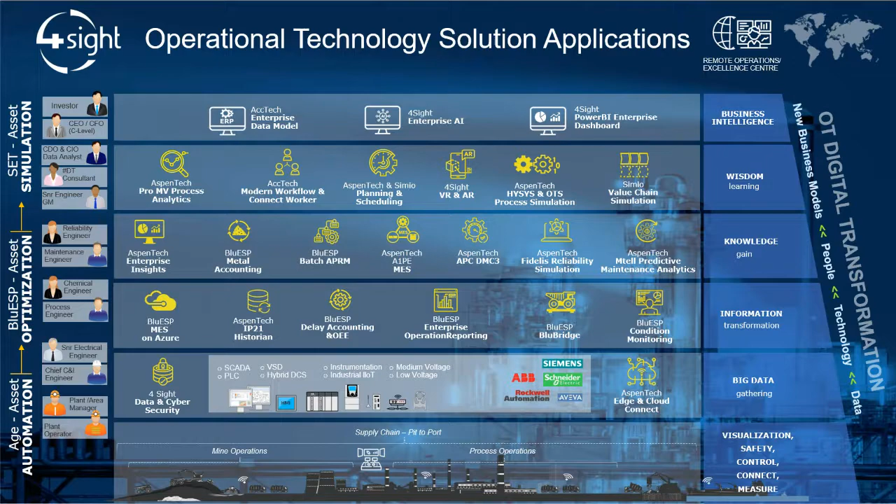If we look now more detailed at BluESP on the next slide, the way we see BluESP is really as an agile and dynamic company.

We basically use AspenTech as our role model to learn from. They've got more than 2,500 engineers, they've been around for 37 years, and they develop some of the best asset optimization technologies out there today. We learn from them and bring it to the local market.

Some of these technologies include advanced embedded AI in their software. More and more, they take existing proven and tested software and bring AI and machine learning into it, into areas like advanced process control. We'll see this during the course of this webinar series, along with hybrid models and machine learning.

An example is the GDOT technology, where they use these technologies to orchestrate much bigger plant areas. Kevin might talk today about dynamic advanced control models and self-learning models, so your plants and control models don't auto-tune themselves out of sync, or things like AI-powered cognitive guidance systems to make the work experience much better.

So various different things. Looking at how AspenTech positions their products: the first set is the design software, shown at the bottom. It's all about how do I simulate a new process, how do I design it, how do I cost it to its optimum, and how do I build it. If I'm going to build a new plant today, I want to build the best one possible. We're not focusing too much on design tools in this webinar, but there's a set of that.

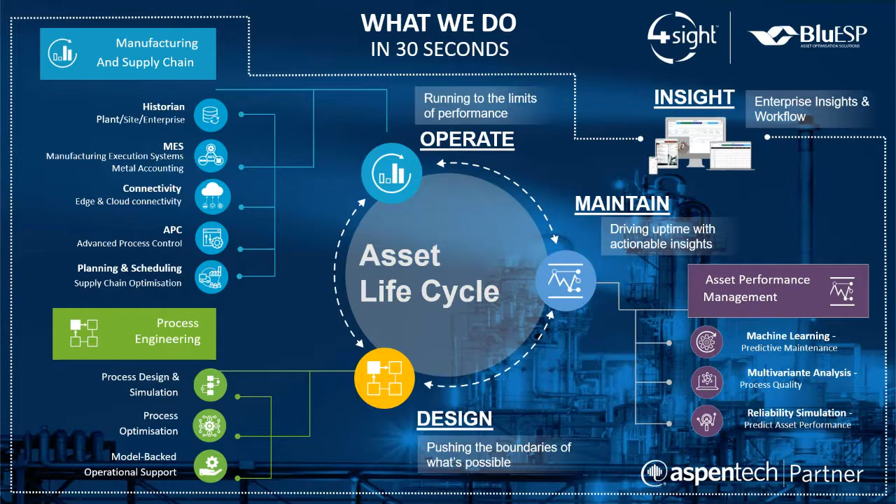The key focus is optimizing control of the modern-day operation, and that's the theme of today. With no further ado, I'm going to ask Merinda Westcott, who is the business unit leader of our advanced process control division at BluESP, to tell us a little bit about herself and introduce the speaker of today. Merinda, over to you.

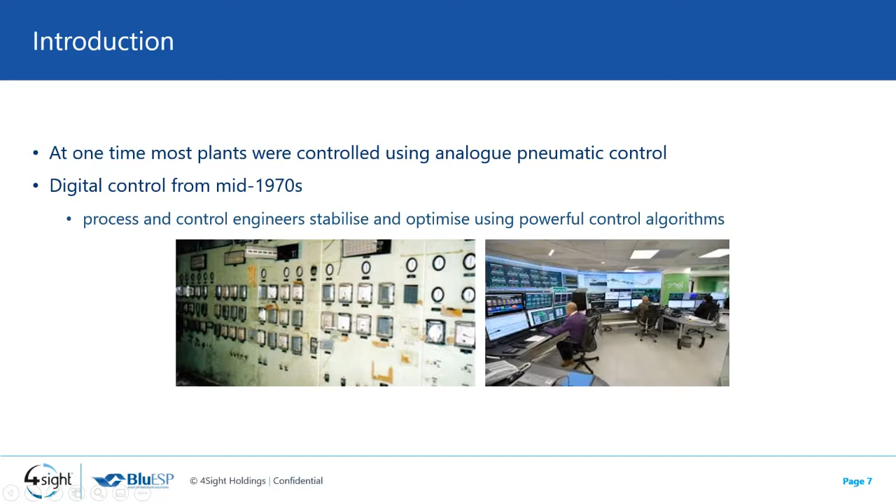Advanced process control isn't one technology, it's a set of technologies, and people have different definitions of what they might be. I've picked out 3 or 4 here to talk about or to mention.

The first is what used to be called intermediate regulatory control, now sometimes called ARC, advanced regulatory control. Typically these are schemes that you can build in your DCS or PLC system. They give you advanced functions like ratio control, split range control where you do different things depending on whether you're above or below set point, overrides where you normally control one way but sometimes control in a different way, constraint control, and decoupling control, which is kind of a first attempt to deal with multivariable systems.

The problem with some ARCs, or even most ARCs, is that they are very well understood by the person who wrote them originally, and when that person leaves the company, no one knows how they work anymore. So they have a maintainability issue.

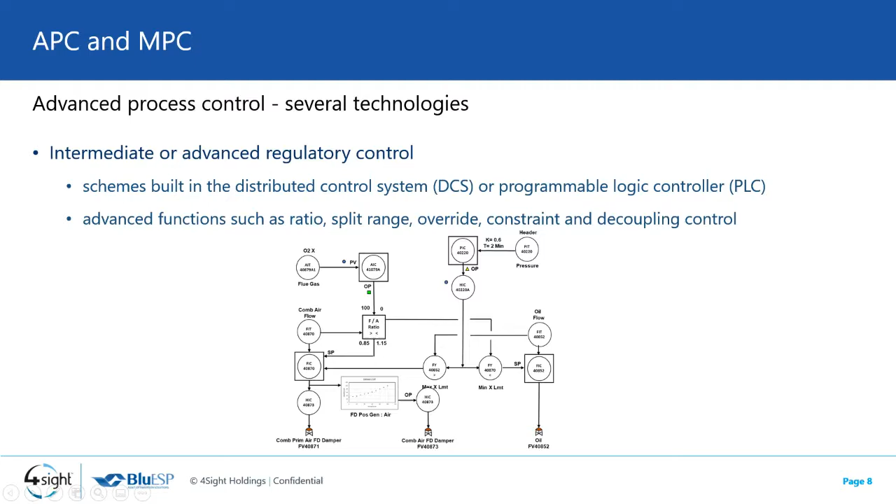Three other technologies include expert control, fuzzy control, and MPC. Expert or rule-based systems are computer systems that emulate the decision-making ability of a human expert. So if you have an expert who knows how to run your plant, why not just copy what they do in a computer program? That's what an expert or rule-based system does. These are quite popular for some classes of control. Of course, one has to ask, why would we limit ourselves only to doing as well as a person can do? Maybe we can do better.

Fuzzy logic is also popular, described by if-then rules, with inputs that can be cold or very cold — so the inputs can be fuzzy. I've done a drawing here of a fuzzy system.

Became very popular in the mining space at a time, I think, and they certainly can do a job. But when we come to optimization, we find that these systems have limitations in terms of building the rules we would need to optimize the system.

And then there's model predictive control, which is really what we're going to talk about today, which uses a dynamic model to predict where the process is going and then potentially changes the trajectory of the process in a way that is optimal and therefore makes money.

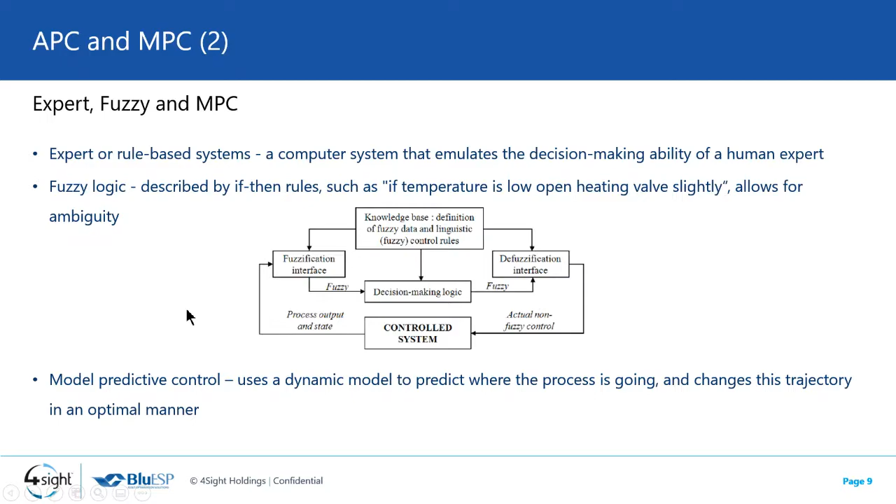So if we're going to do model predictive control, we need models, and we can classify these models as linear or nonlinear, empirical or rigorous.

Starting with empirical models, by that we mean that we find the models using data. We do a plant test, or we go through historical data and we calculate some sort of statistical model. So there's no physics behind this, it's all statistics, if you like.

They have no background in the mass, energy, and momentum balances that chemical engineers are so fond of. So we could derive rigorous models for our processes, and we do.

These are accurate. They can extrapolate. They can take us from one point to another, but they turn out to be expensive to build and validate. And in fact, to validate them, we often need the data that we need to derive the empirical models.

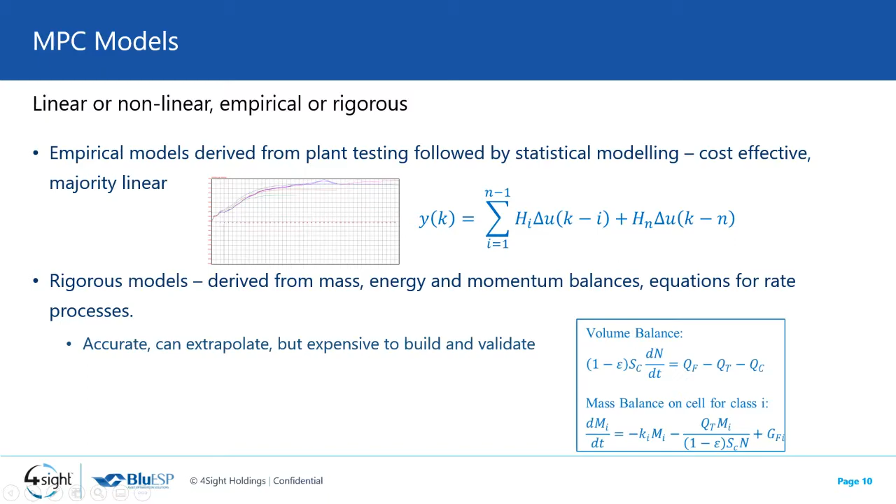So what we find in practice is that the large majority of commercial MPC applications use linear empirical models. And that's from a cost saving perspective.

A little bit of history about these MPCs. Originally, they came out of the oil refining world. Mid-80s or early 80s, Cutler invented a formulation, if you like, of MPC called DMC, Dynamic Matrix Control, which eventually became DMC Plus and DMC3 from AspenTech. Unfortunately, Charlie Cutler died a couple of months ago, I've been told.

Round about the same time, some people from Honeywell and some companies that Honeywell acquired created a project called RMPCT, Robust Model Predictive Control Technology. And a different group at Shell, led by Pascal Marquis, developed a product called SMOC. I believe that stands for Shell Multivariable Optimizing Controller. And that's used a lot in Shell refineries, even currently.

So it was an idea whose time had come. In 2003, Joe Qin and Thomas Badgwell did a survey with the companies of MPC applications, and they list 3,000 odd applications in refining, petrochemicals and chemicals, and more than half of those used AspenTech technology. So this is clearly a successful technology. If there are 3,000 applications, and that was 2003, you can probably count on that being doubled by now.

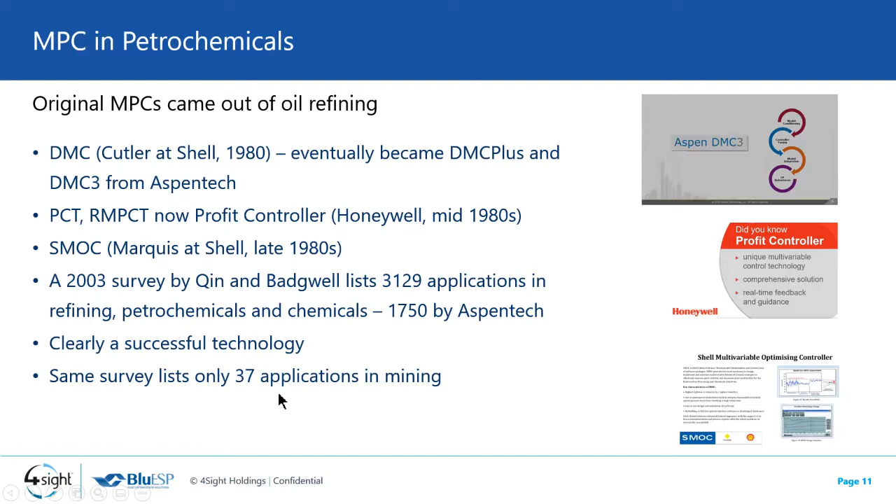More recently, Rogers and co-workers looked at the literature for what's been published on MPC. And they list a number of references in a number of processing areas, and they're all very interesting. The trouble is only 6 of them in total are industrial applications. So something's strange, because either we're not doing MPC in mining, or we're not talking about it.

And I think it's a bit of both. We're not doing as much as we could to improve operations using these technologies. And then the ones we have done, we're not publishing. So there's room for improvement here.

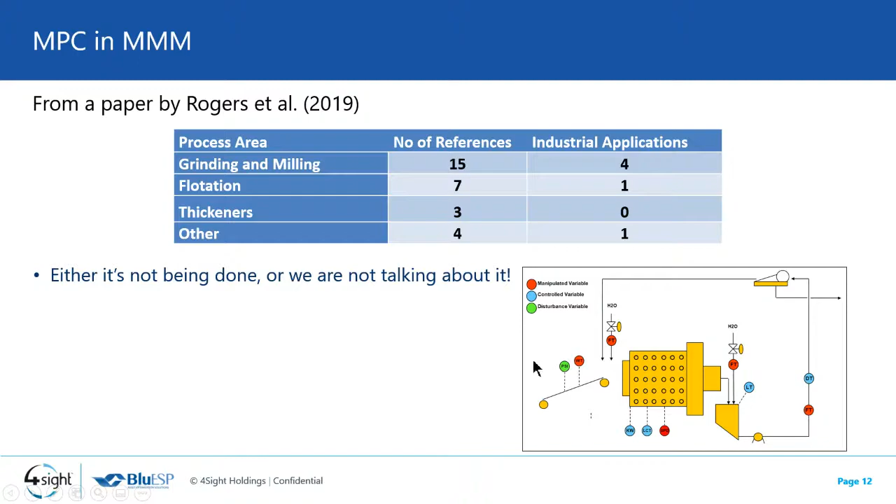So clearly we're not going to do MPC because it's a cool technology and we like building models. We need pointers to what kind of processes would benefit and what are the financial benefits.

Because MPC is model-based, it inherently handles the interactions within systems. A lot of the processes we deal with are interactive. If we increase the feed to a mill, more than one thing changes, and we may have to make other changes to compensate for that. So there, the model predictive technology helps greatly.

In some cases, we're limited by different constraints at different times. It could be day, night, summer, winter, or product grades, so we may have to change grades. In that case, you want a flexible control system.

This third point is really very important. If your system makes more money when it's operating close to constraints, it is a good candidate for MPC. Because what the MPC does is it takes the operating point that we have now, somewhere in the middle within the operator's comfort zone, and pushes towards the operator's discomfort zone, where the operator won't operate. And if in that pushing we make money, then we can make that money consistently.

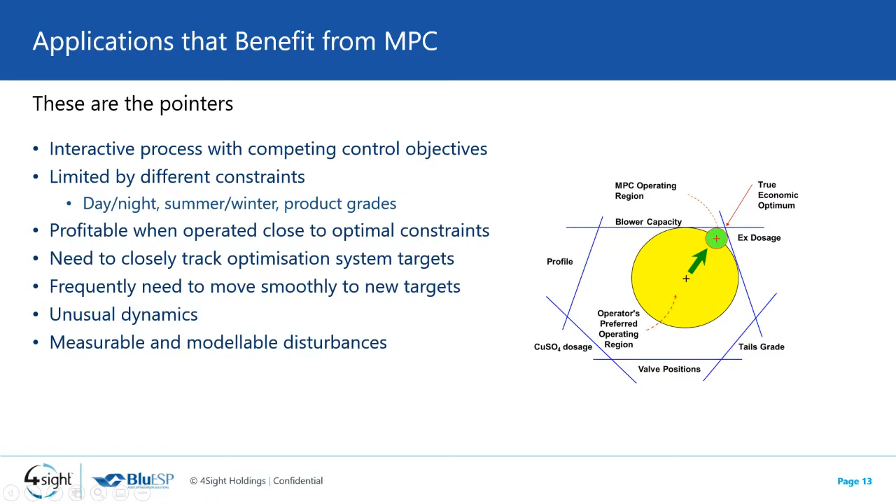So despite the paper by Rogers, I thought I'd put together a list of where I know MPC has been done in mining, either where we've done it, where colleagues have done it, or I've just heard about it. And it is a large list.

Mills in particular - primary, secondary, ag, sag, Isamills - crushers, flotation, which I'm going to talk about later, leaching, some work I've been doing recently, and some work I know that was done at Alcoa. Thickeners and clarifiers have been done. We've done cyclone banks. There has been some look at dense media separation, not as much as I would like.

We've done electrowinning. Boilers are interesting because you shouldn't ignore the utilities on your plant - this might be low-hanging fruit for quick wins on benefits. Flash dryers, acid plants, jig plants, hot gas generators, and ones that I don't know so much about, but which I think will come, are smelters, solvent extraction.

And although it may seem like a simple unit operation, it looks to me like there are cases where filters could benefit from this technology. So this is a wide range of unit operations that we have and could look at with MPC.

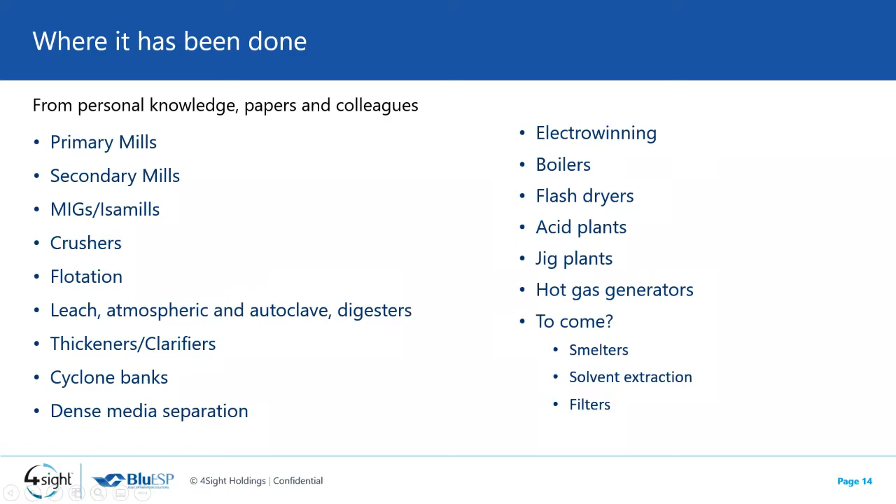So for a case study, we're going to look at work done by this group in Mount Isa. Mount Isa is in Queensland, Australia. It's a very interesting site geologically because it has a vein which is lead and zinc, and another vein which is copper. So there are two processing plants on one site doing two different processes, or making two different materials. It's very famous for its very tall stack because there's a lead smelter on site, and so they put the effluents up high.

The work I'm going to talk about - there are some publications. Myself and Ryan Courts have written a paper, and Adam Price, who is with Glencore, and some of his colleagues and me wrote another paper which is available.

And we did a number of projects on flotation, both zinc and lead circuits. I'm just going to take as an example of what we did 2 cells. Obviously we had more than 2 cells, but just to make it easier to understand, we're going to look at how we would model 2 cells.

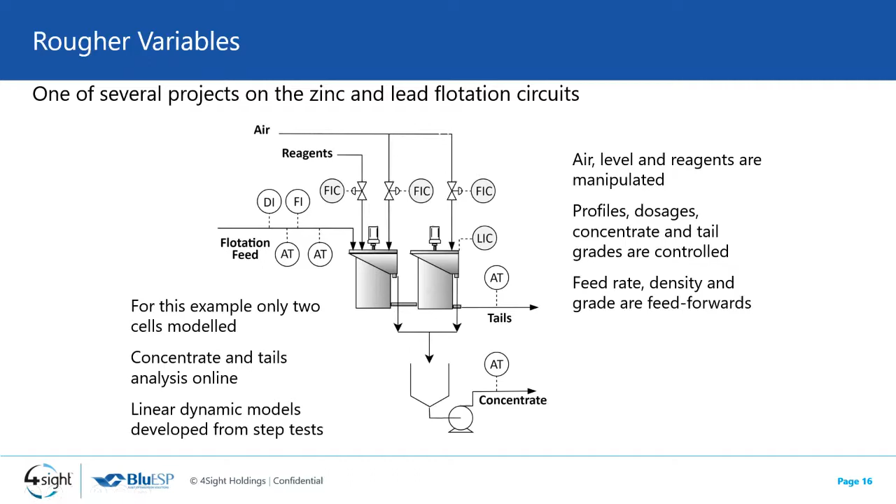Okay, so how do we do this? Well, what we do is we go off and do a series of step tests.

What I've shown here is a period of intensive step testing of the air and the level, and the copper sulfate, which, if I remember correctly, is the collector, and the EX, which is the sodium ethyl xanthate, which is the depressant. I may have those two the wrong way around.

Over this period here, you can see we are injecting steps into those inputs, doing a planned experiment where we're moving things. This in fact was done by the computer. Historically, we used to do these things manually. We still sometimes do it at the early part of a project, but afterwards we've got tools now that will do it automatically.

I've shown just two outputs here. These are the primary rougher con zinc moving around, presumably as a result of all these moves we're making, and the same with the primary rougher tail zinc. Those are moving around. Something went wrong there, we'd have to get rid of that data.

The reason I've shown more data is just to show that some of the data, even where we weren't stepping these variables, can still be used because the operators were presumably moving some stuff around here as well. Okay, so this is the AI plot, if you like.

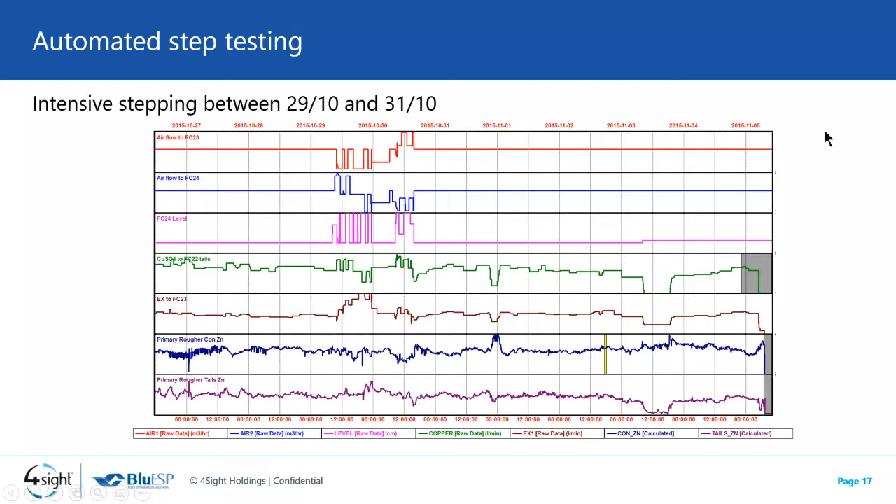We never used to call it that because we didn't know what AI was, but this is the part where we take this data and we attempt to turn it into models.

And the models look like this. These are called unit step responses. The unit refers to the fact that they are drawn for a step of one in the input.

So for instance, this model here is the response of the concentrate zinc to a change of 1, presumably percent, in the level, over a 90-minute time period. So what do we see happens? Well, nothing happens for 10 minutes. There's a delay, and then there's a reasonably sharp drop, and then the zinc stays reasonably constant.

Some other models down here where the density goes up, and this causes the tail zinc to go up. So these are statistical models, they're fits, and the more data we have, the better the fit. We've got very sophisticated tools now for doing this fitting in the AspenTech suite of software.

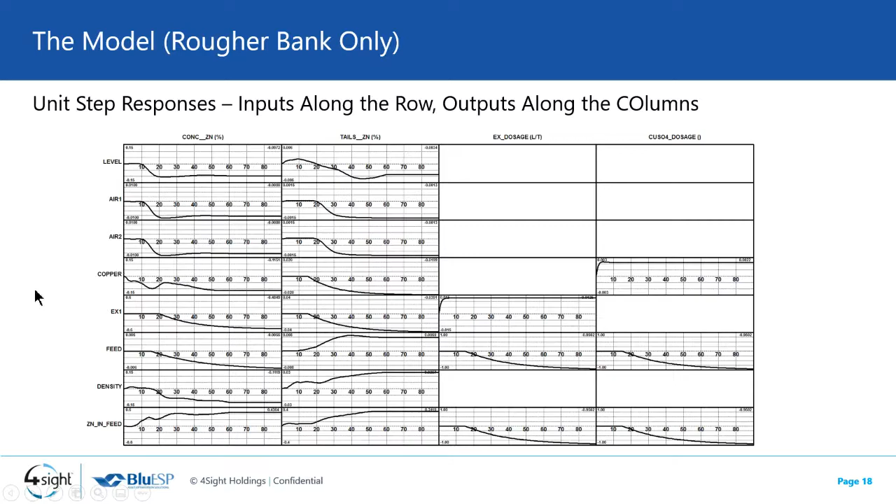So what can we do with these? Well, we have to define our control objectives. For this process, we want all grades within limits. We want reagent dosages within limits. Ideally, the system should find the reagent dosages.

But generally, the metallurgists do want to say, well, even if you want to reduce the dosage below 0.1, I'm not going to let that happen. So we have to keep dosages within limits. And then we like to maintain a particular air and level profile down the bank.

And then for optimization, we maximize recovery by maximizing airflow, and at the same time we minimize reagent dosing to save money on chemicals.

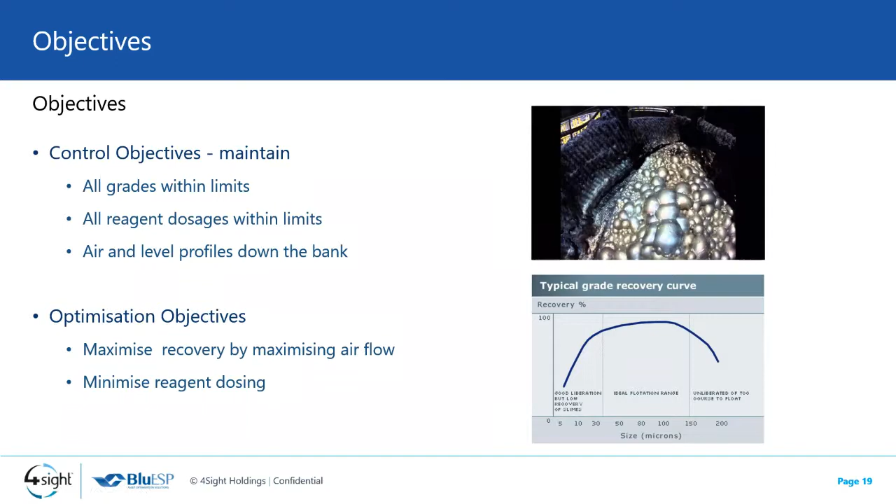What do the results look like? Well, these are some results from the paper by Brooks and Courts.

What we're drawing here are histograms of the dosages of the two chemicals. The dotted line is a histogram, a frequency distribution before we did the APC, MPC, and the solid is after. You can see very clearly here that we have a sharper distribution, which means we're controlling better, and we've moved the average significantly down.

In this case, from 7.8 to 6.1. That's a 20% improvement, that translates straight into the bottom line. Similarly with the ethyl xanthate, it's even more, 38%.

So the aims of the project were very well met, and this is subject to always being within grade constraints and recovery constraints. So this is a very visual way of looking at the results from these sorts of projects.

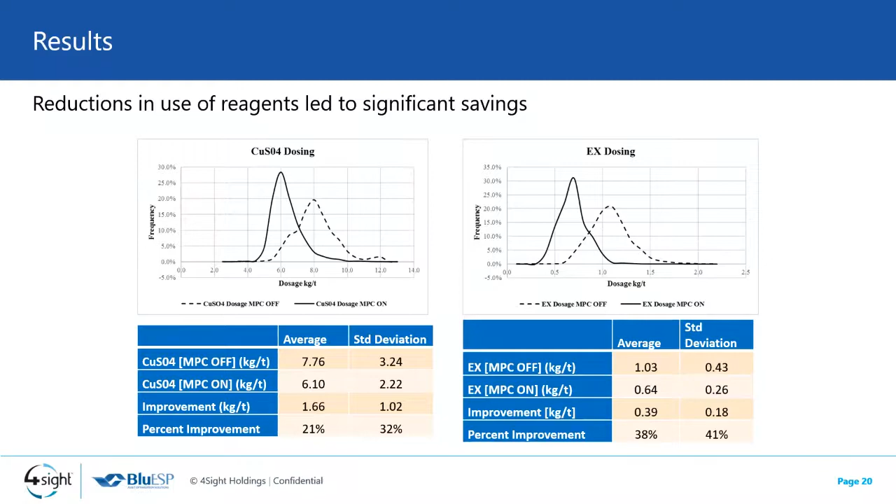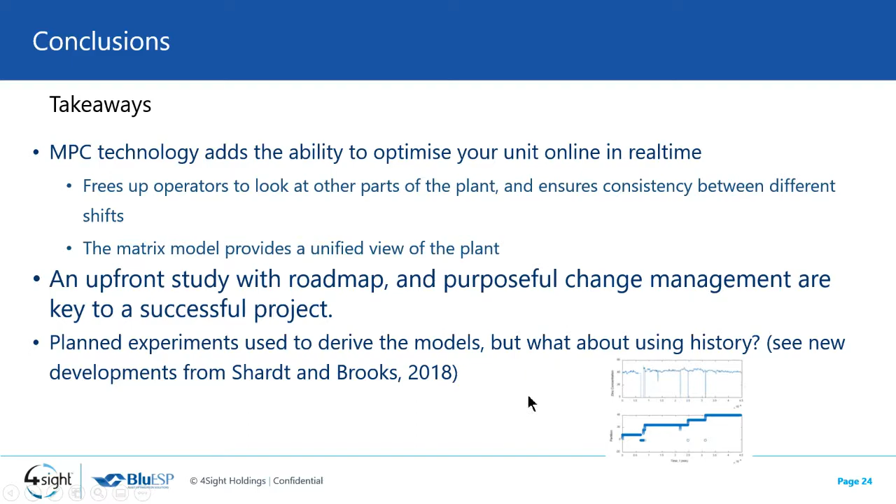But I am doing some work with a colleague in Germany. We've published a couple of papers. This is the first one where we use sophisticated techniques to slice the data in a way that we can then use it for model identification. So thank you very much. There are the references that I've used during this paper. And without further ado, I'd like to move into the questions and answers.

So back to Merinda. Thank you, Kevin. Thank you for that very insightful presentation. I'm sure everybody found it extremely useful.

I've got a question here from somebody asking, what would I do if my process is really very nonlinear? Yeah, and what we found is that there aren't too many very nonlinear processes.

So the linear technology has feedback in it. We develop these models, and while we're running, we adapt them by putting feedback into them. Provided you do your step testing around the area where you normally run, the linear models manage fine. If you have a real nonlinearity and you know what it is, you can build it into the models in a number of ways, using gain scheduling or a fully nonlinear controller. But I'd say less than 5% of applications need that. Another way of looking at it: the 80-20 principle tells you you're going to get 80% of the benefits with the linear controller. You'll have to spend a lot more money to make the nonlinear controller, and the benefits probably won't be that high.

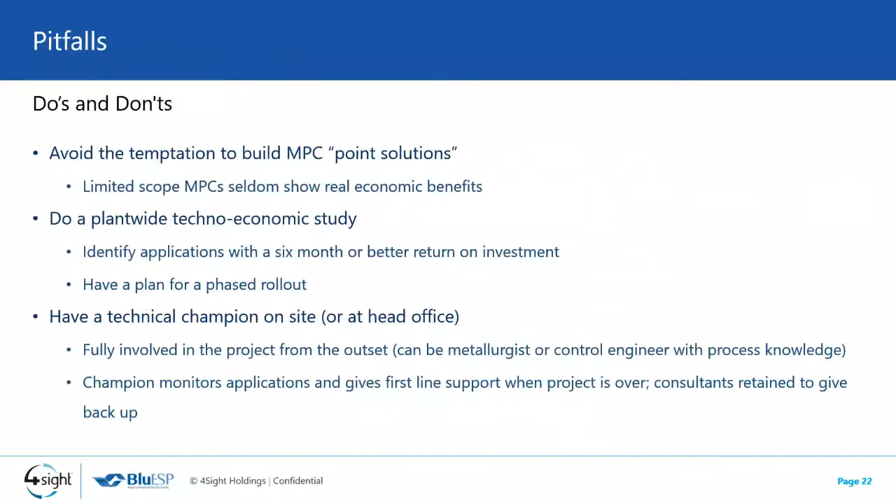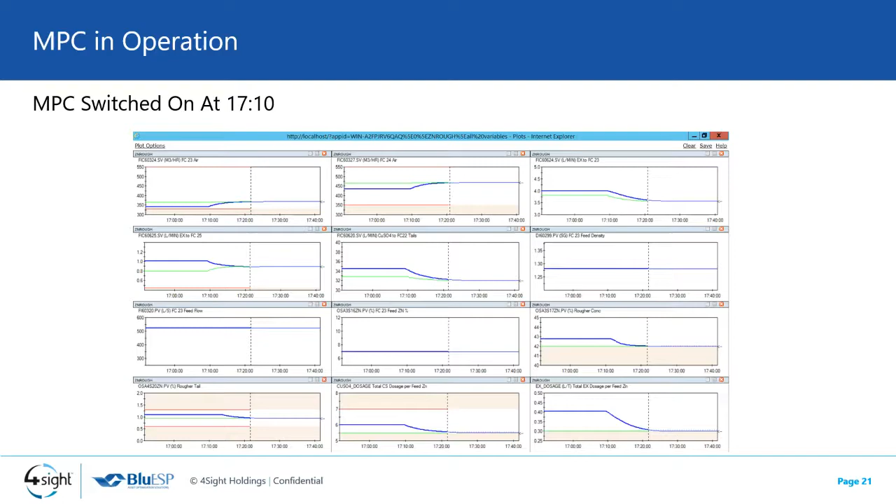So this trend can be formatted how you want. You don't have to put in all the plots, and you probably don't want it bigger. I think we can do 6x4 or something on one page. 24 plots are plenty. So yes, I think there are tools, and if used by sensible operators, they lead to interesting discussions as well when you're commissioning, because the operator can see what the system is doing. It's quite transparent.